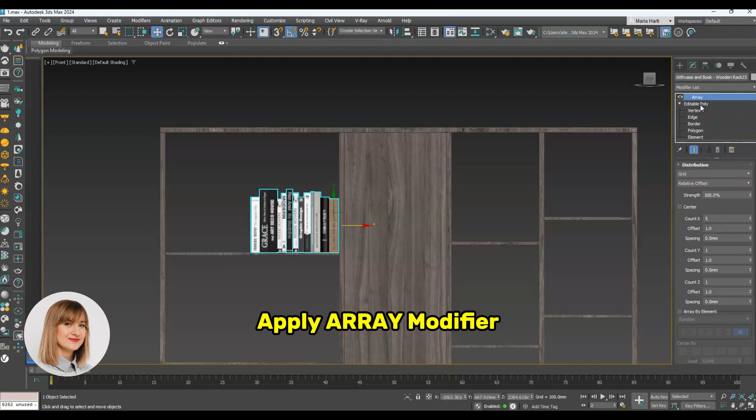Distribution settings, grid and fill. Check Array by element and for element distribution random. Set the right axis to be centered by. In the next step, you'll need to set up the length for the entire array. Also, choose the right offset or spacing for distance between elements.

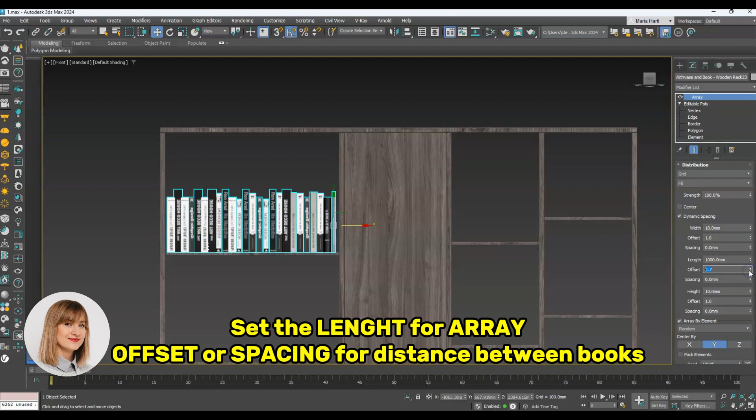Check Pack Elements and seed the variations for your books. If you need to fill up more than one shelf, then go and set up the height and the offset between rows.

You can always come back to your array settings and make any changes you need. Change the length or height or seed variations for your array.

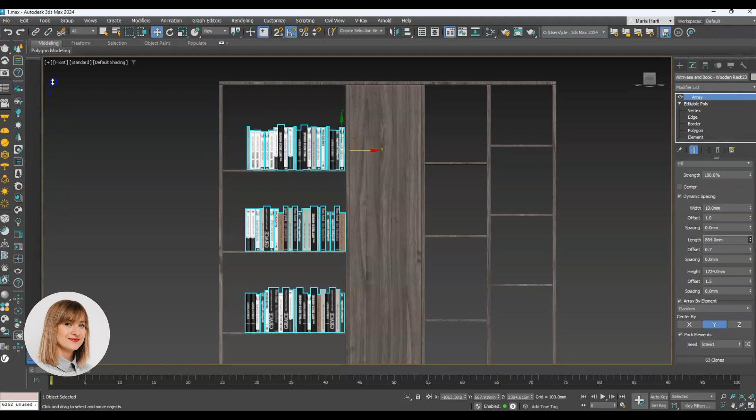In order to get a more realistic effect, you can randomize the books' position by adding a slight rotation angle.

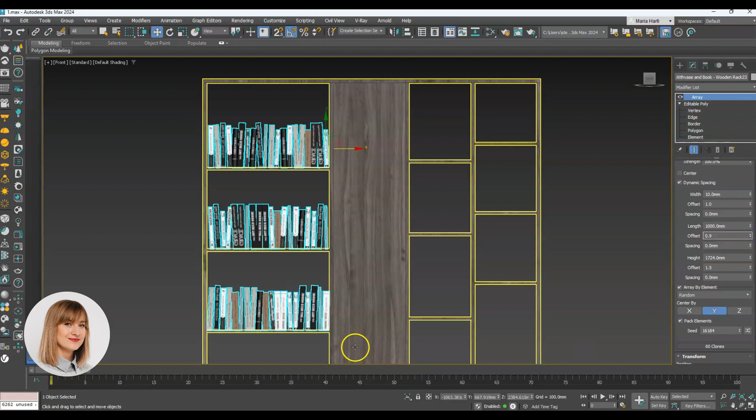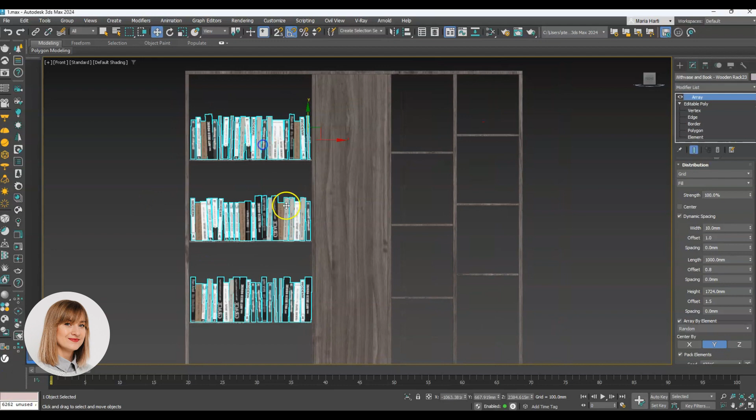Make a copy and make the necessary changes for the next shelves, or just start over again and repeat the steps to get all your shelves filled up with the books.